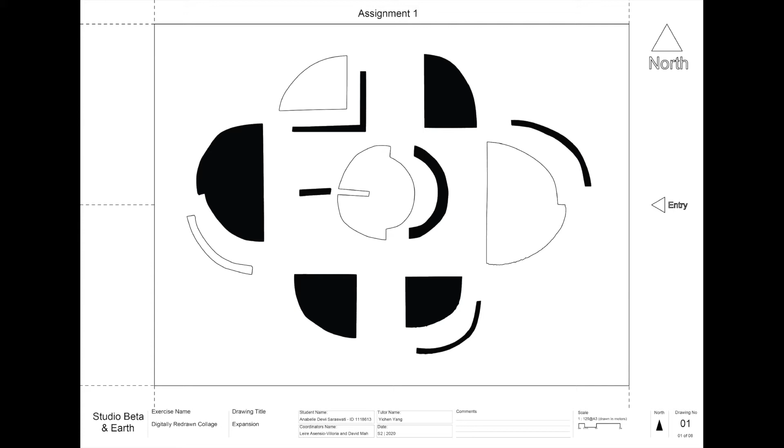Chimera is a composition made up of two distinct modular elements growing as one. This was an experimentation of using two contrasting geometries of the continual curve of the circle and the jaggedness of the framing components.

In the next part of the assignment, I focused on the concepts of exploration, play, and even more so, interaction with nature. For the rule-based collages, I experimented mostly on modularity to create a field.

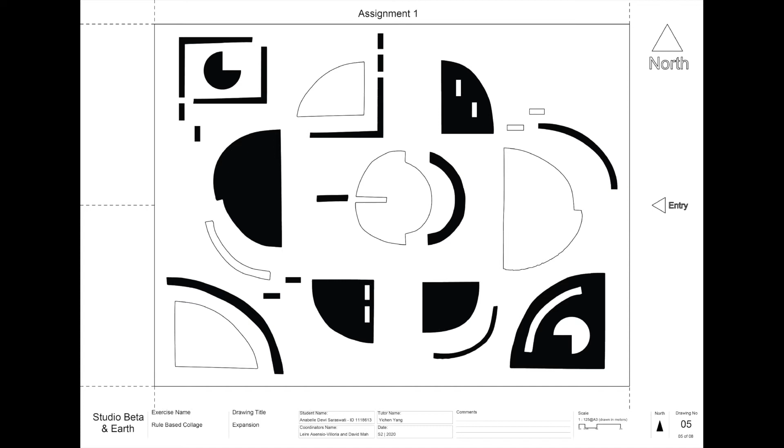In expansion, I began breaking the geometries further apart and inverting reflections, which resulted in a clear introduction of suggested circulation and thresholds. The result was also very similar in Chimera, a repetition of the same types of geometries with varying directions, sizes, and grouping created an interestingly uniform field.

And here is my last rule-based collage. Symphonia is a combination of the organic curves of filigree and the rule bases of Genesis.

The design was produced by drawing one continuous line with intersecting curves to create one single composition, and then highlighting the positive and negative spaces by only hatching in opposite intersecting geometries, which created a composition of harmonious discordance that is consistent throughout the site, all connected in one continuous line.

I am aiming to build a lush park that sparks curiosity and encourages exploration, a public space with many opportunities for private pockets and a green library as its central program.

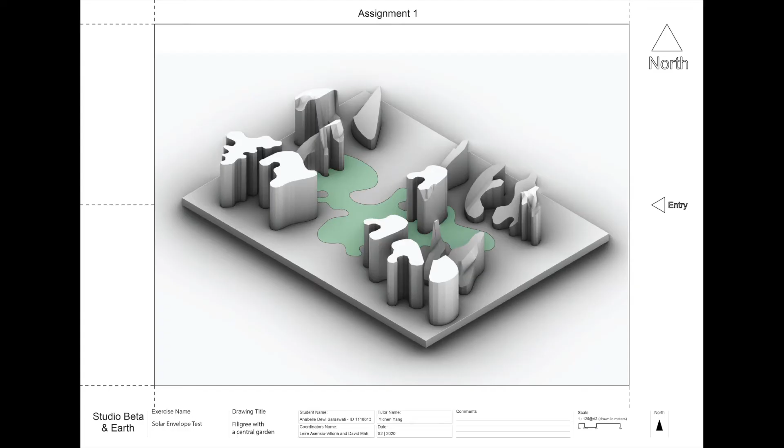Here I've tested filigree solar envelopes and solar fan with one central garden. And this is a solar envelope test on all the negative spaces of Symphonia and also with a central garden solar fan test. After these tests, I began creating my own 3D design of the space, understanding which buildings and ground would receive the most early sunlight.

The final design came to be Symphonia. I began by choosing which geometries would be built forms or landscaping, as well as the general circulation of the site.

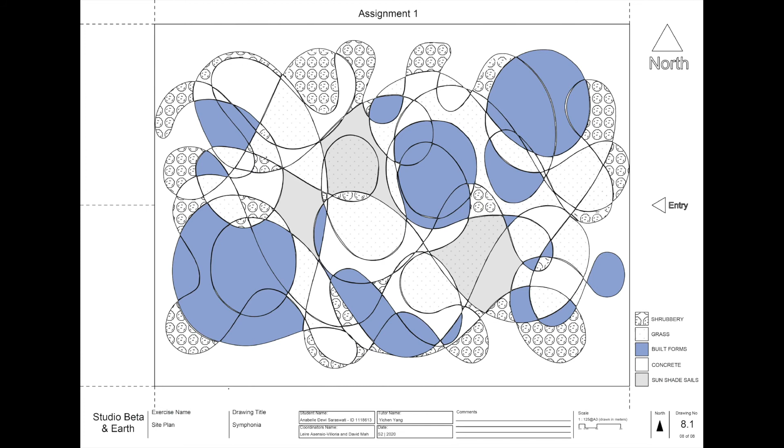Each separation created within Symphonia has an immediate relation to its adjacent, making all of the potential elements within the design possess inherent flow and allowing a more permeable separation between the buildings and landscapes, the interior and open space, or between the private and public, as they are all produced through one continuous line. And here is my first 3D design after sectioning.

To analyze the solar reception of the main structures, I did a group mass solar envelope test and found that only this structure needed to be altered.

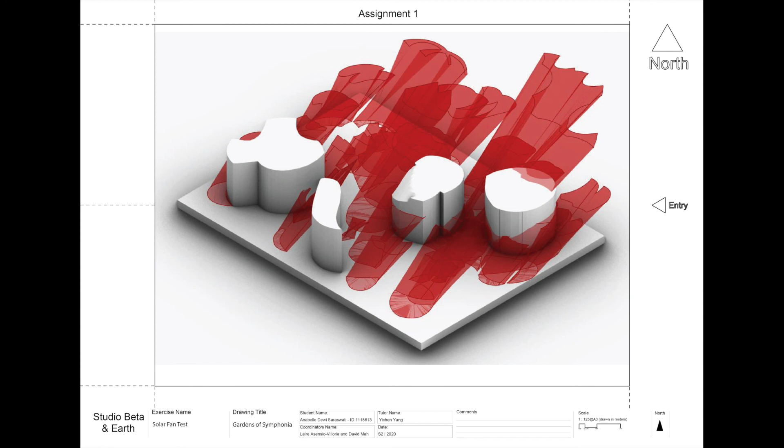Here is a solar fan test of all the gardens in the site. So this is the final 3D model post solar tests, and I did make a few alterations as to garden locations to keep certain structures intact.

And updated this building because I am planning on making this structure into a greenhouse, which will need sunlight.

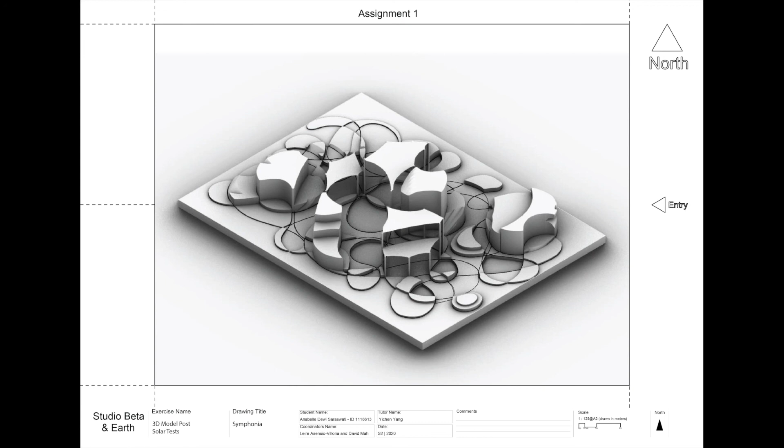Because I am aiming to achieve a sense of tranquility through opportunities for exploration in my design, the continuous curves of Symphonia provides a sense of order, yet the forms created through its intersections provide interesting pathways and framed views, and that is why Symphonia is my final figure ground drawing choice.